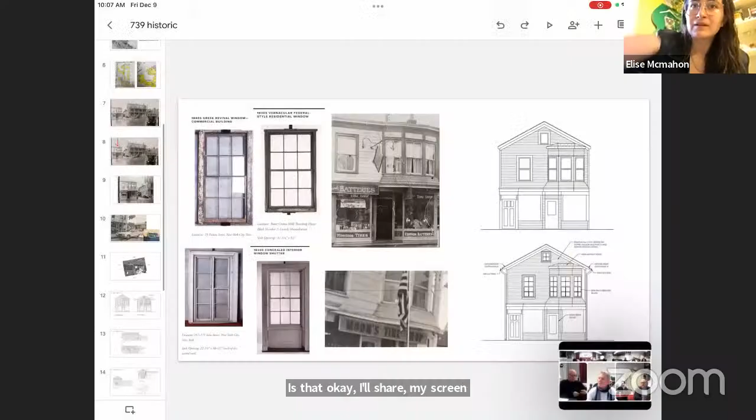Can you see that? Yes. Okay, great. So I'm here representing my mother, and we've been working together on the renovation plan for 739 Columbia.

One thing that was interesting is that I went to the library to find out from the archive any history and find images of the building, and there was actually a lot of documentation. The property used to be owned by the same owners as the St. Charles Hotel, then it was subdivided, and the building wasn't there until 1921. It had been pulled up Lower State Street with a team of horses, which was interesting. It was owned by an operator of a gas station, then he sold it to the operator of a tire shop and mechanic shop. It was purchased in the 70s by Tony and Josephine Cusimano, who then sold it to his sister in the 90s for $1. We just bought it from him last year.

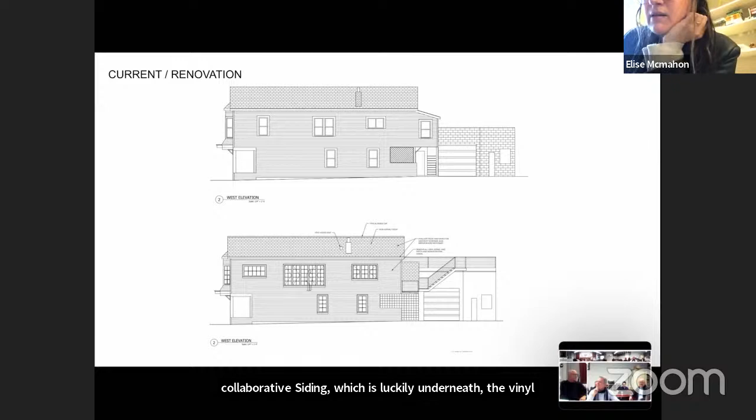Here's the side of the building and what's along the alley. We would hopefully be making the windows a bit larger and doing the same kind of Munson style windows, updating them. On the back, there's a kind of unsafe, not to code stairwell.

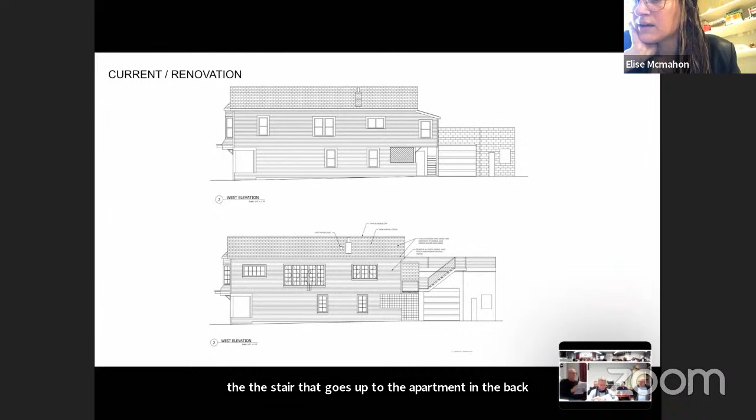So we would be removing the stair that goes up to the apartment in the back, and doing a code compliant stair, and also enclosing that area so it doesn't allow rainwater in. To do that, we did a glass brick wall on the bottom right there, if you can see. I'm happy to zoom in if you're curious to see closer.

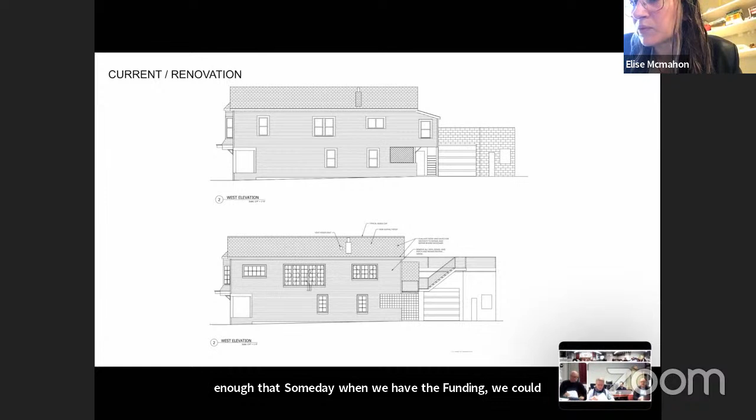We would be repairing the roof, basically making it strong enough that someday when we have the funding, we could do a metal roof, but right now we would just be replacing the asphalt shingle roof.

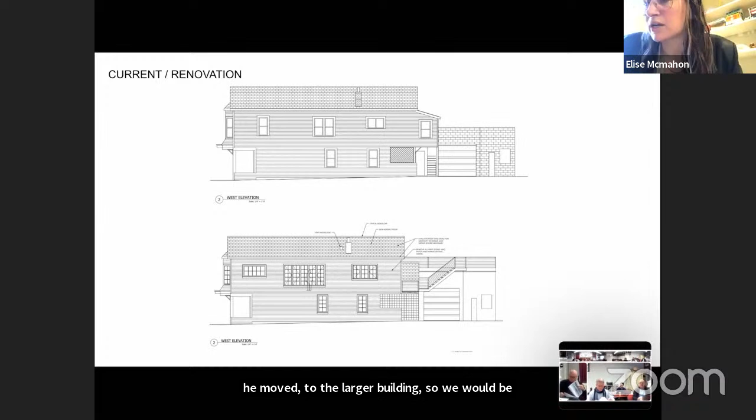On the back, there's the garage, which used to be kind of the tire shop for TJ before he moved to the larger building. We would be keeping that a garage and then having the stair also lead up to a porch there for the apartment to have some outdoor space.

So here's the back view. And on the right, you can kind of see how the stair is just going straight up to the apartment. And there's also the small balcony that comes out of the kitchen.

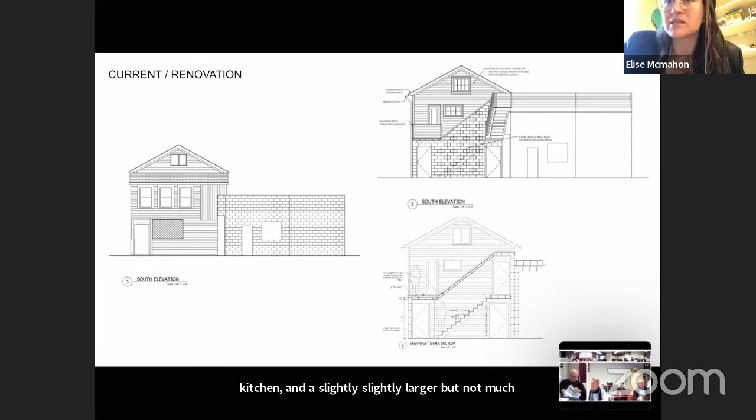And a slightly larger, but not much actually, just a slightly larger window for the attic there. And then basically because we would be removing the stair area, there used to be like an upstairs back porch that had windows on it, like a solarium. So that's all getting removed because it wasn't code compliant, and we would be replacing it with this smaller upstairs balcony.

And then this is the side that faces the chocolate shop, and it is not visible, and we're not changing anything about the windows there. We'll just replace them and make them more heat insulative.

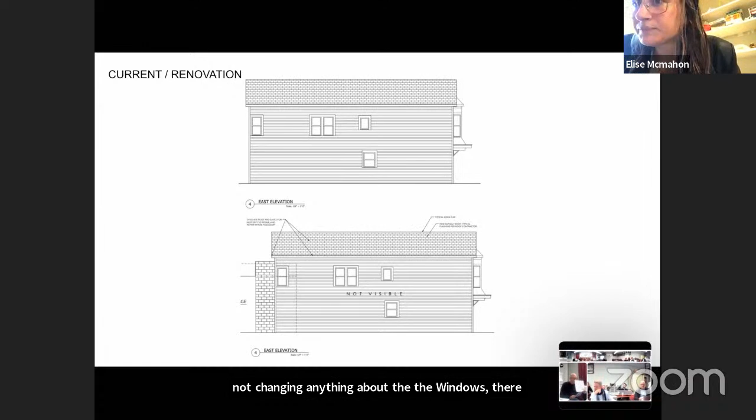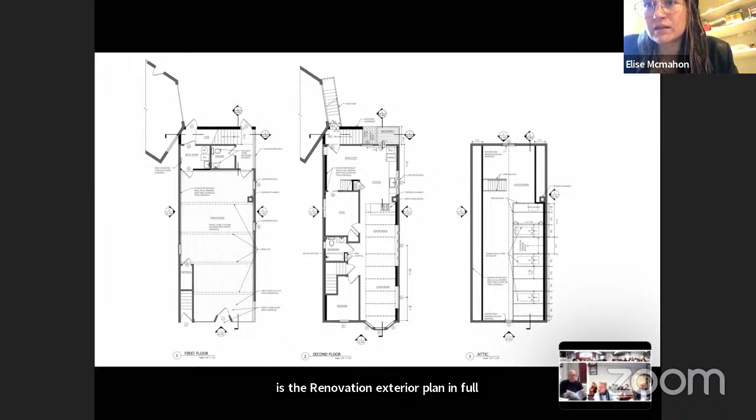And this is the renovation exterior plan in full, and then this is the layout. I was also bringing up some images of window reference images from the time period. We're not exactly sure what year the building was built - we just know that it was brought up State Street in 1921. So we imagine sometime in the 1800s to late 1800s. You all probably know more by looking at it.

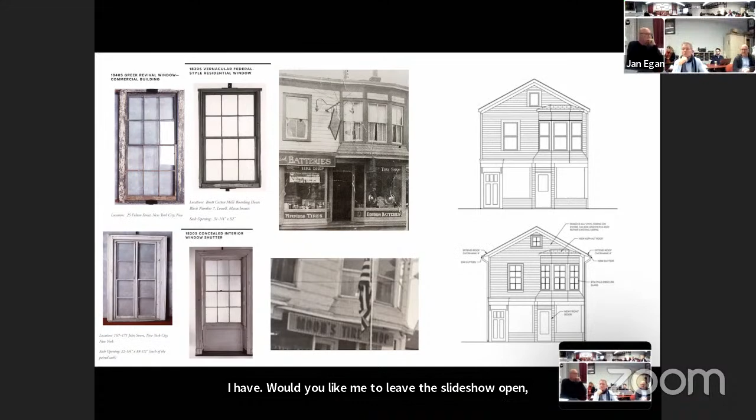But yeah, that's all I have. Would you like me to leave the slideshow open, and would any of you like me to flip back to any of the pages, or should I close it? Yeah, please leave it open. Okay, so any questions, comments?

Yeah, I'd like to start. I think the history, the research that you did was terrific - that's really an interesting fact that it had been moved there from State Street. I'd like to start with the facade and the windows. I think if you look at the original photograph, you'll see it was 2/1 windows, and even the old hotel next door is 2/2. I don't know if the 4/4 would really be appropriate.

It's 2/2 in here, I'm sorry, 2/2 rather. Yeah, that's the one - if you zoom in on that picture, you'll see the windows are 2/2. And that's more typical for a building of this period, and you'll see that on the hotel next door as well. Okay, I see.

So would that have to carry through the entire building, or could that just be on the front facade? I would recommend that it be the same all over, because that's probably what it would have been.

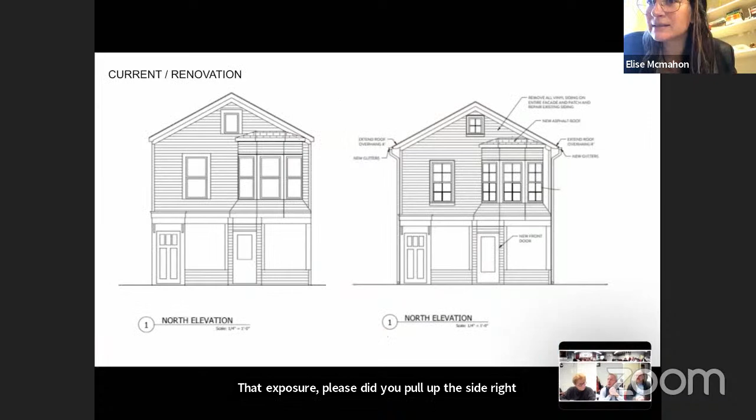And I just wanted to talk about the facades - I would recommend that you stay to 2/2. And regarding the side, I mean, you're really altering that exposure. Elise, could you pull up the side for us? Yes. By changing the window sizes and style.

Yeah, I wonder, would it be possible to basically just do the 2/2 windows? I'm curious kind of how we would do the more horizontal windows, but I feel like we could find something correlating to the 2/2 style.

Does anybody else have a concern - let's deal with the issue separately. Does anyone have a concern with the reorientation of the side facade window? They're changing the orientation of the upper left, they're doubling the size of that center window, they're increasing the size of that third one, and then the bottom two are about the same. Does that bother you particularly?

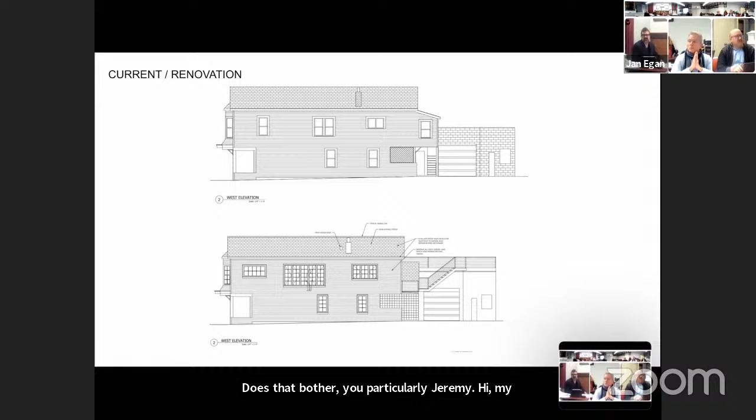My biggest question was about the 2/2 - I think that'll be the second question though. The glass block was the one thing that really stuck out in my head as being incongruous with the rest of it. Yeah, I have less concern about the orientation of the windows because they're already kind of miscellaneous, and it is an alley facade. But I do agree with everyone else that the 2/2 is much more appropriate.

So if the applicant were to revert to 2/2 throughout the building, would we be comfortable with this window arrangement? I'd say yes, I would. Okay, I think we'd like to see what this ends up looking like though - we want a rendering, because you're gonna have to figure out how you're gonna make this large. Okay, so maybe that's the request - how does that strike you? That's absolutely fine, you'd like to see a rendering of this with 2/2. Yeah.

Of the facade and the side. But I think the commission is open, assuming that comes out well, to the arrangement of the windows that you have.

Okay, thank you. But also look at it as an opportunity - if you look at the large window on the back, to align that right edge. If you're already opening it up, you might look to create some clear verticals here. There's still some misalignment that you can rectify as part of this, that we've seen on the side.

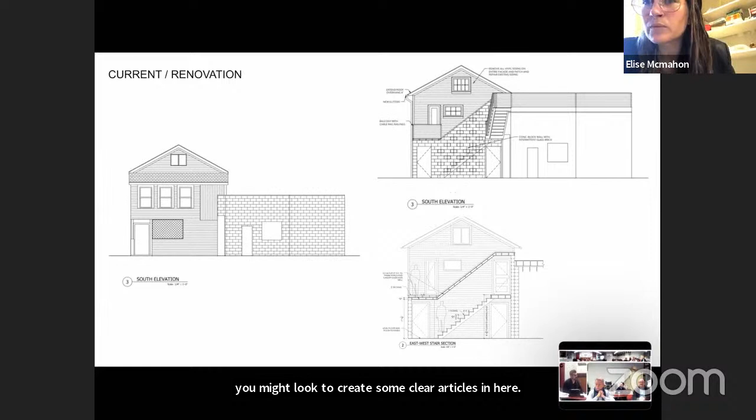Which edge are you referencing? Sorry, I'm just looking at the photo. We're gonna go back to the side, the previous one, to the large window. The large window that you're proposing - if you look at the window below it, it's misaligned. If you're opening up that hole, why not align that right edge? Try to create some plumb lines with what you're doing with the grid. Absolutely.

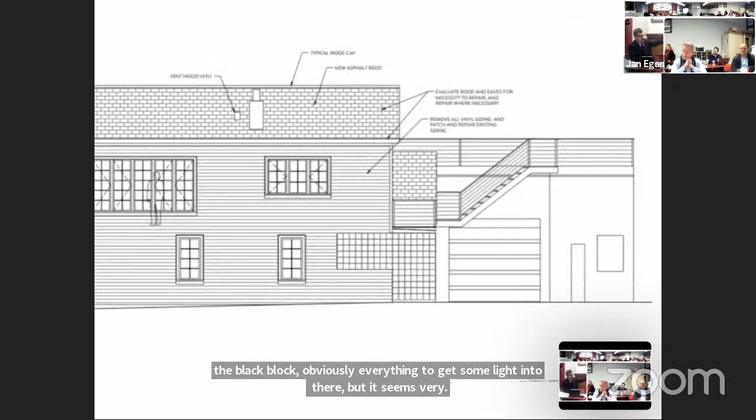The glass block - can you explain to me the rationale for the glass block? Obviously you're looking to get some light into there, but where's the glass block? Can we see the small grid, lower right? That's all glass block. So what's interesting is it's been a very awkward back area since the 70s.

And it has this kind of open lattice walkway happening. And basically the back area is now becoming aligned more with how the garage has this cinder block and stuccoed surface.

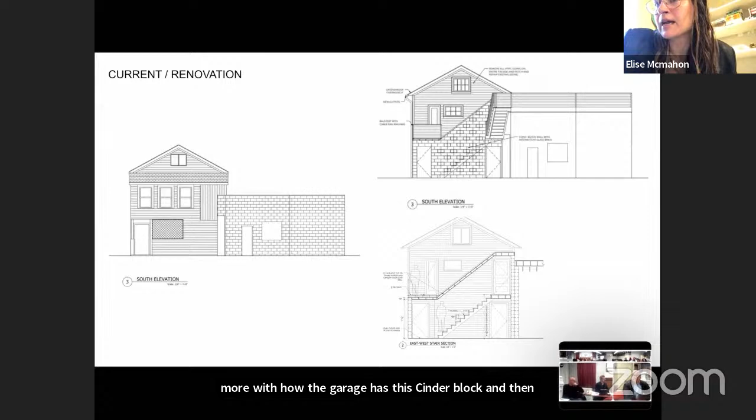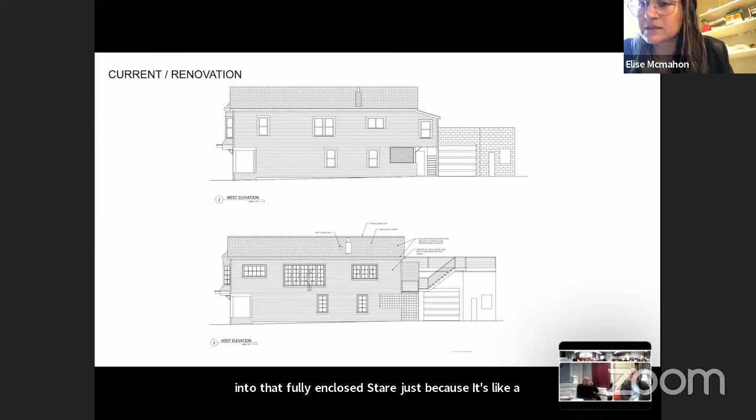And so to bring some light into this cinder block diagonal stair, there will be some interspersed glass bricks in there, shown with these darker lines. It's been all spec'd out by our engineer. We were hoping to have the glass bricks on this side just to bring more light into that fully enclosed stair, since it's a very enclosed area to keep it watertight. We wanted to bring in as much light as possible in an admittedly playful way.

And also because it's in the back of the building, it's not very visible from the front of the street. So we were taking it as this opportunity to transition to the back area.

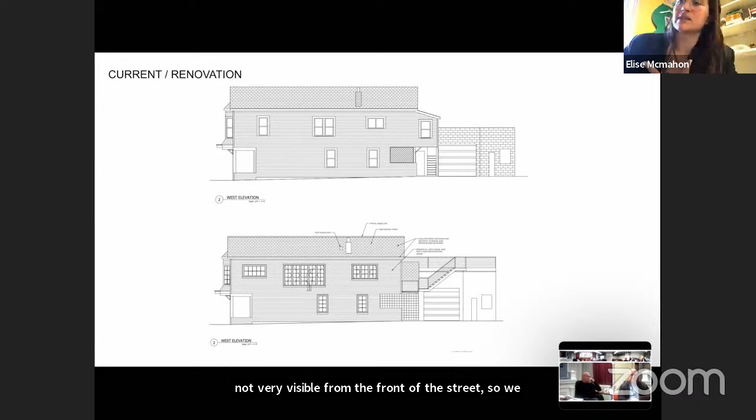I think Jeremy's not that enthusiastic, like the other commissioners. Part of what's challenging about this is that we don't have a photograph of what the back looks like now, and it's a little hard to figure out from the elevations. So that would be helpful, I think, if we did have a current photograph of the back.

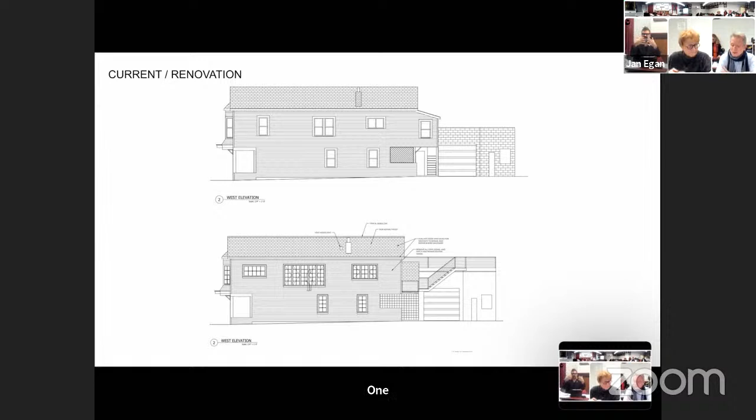The transition is tough to read. It's like we're trying to merge two things into one - either make it modern or keep the integrity of the original architecture. I think this kind of hybrid, the introduction of the block on that facade, feels jarring to me.

Is this visible? On the alley side, there's a building - it's very near to where I live, so yes, there's a building, what's next to it, three feet away, a Tudor style garage. That's it, that's the back of the garage. It is - so you can see, yeah, there's a large parking lot there.

Yeah, so it's rather visible. I think we're all saying we'd be more comfortable with something that was a little more consistent with the style of the building. If you do a window, it would work and ties into the other window.

Since you're coming back with the 2/2, would you consider reworking that? Yeah, definitely. I'm still hoping to do the cinder block on the back if that's possible, with the interspersed glass brick, just because-

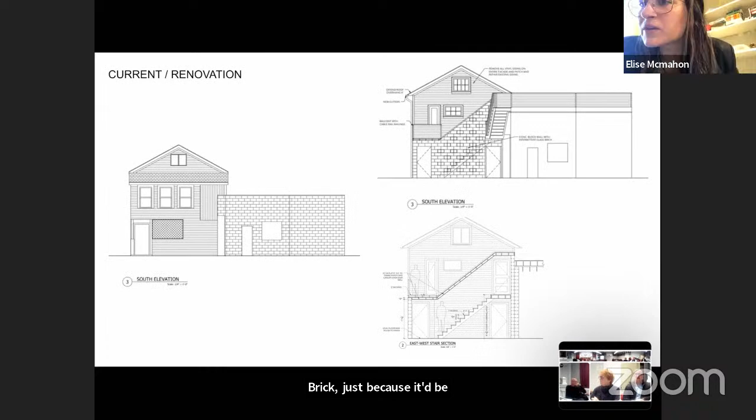Go back to that, let me see. So basically in the way back, which is very much not visible to the street, I'm hoping to keep that relationship to the garage, if you all are open to it.

That's the back of the house. This is the total back. So it's not visible - does anyone have concerns about that? It feels like it has intent and it's on one side, and it's not wrapping around the corner, right?

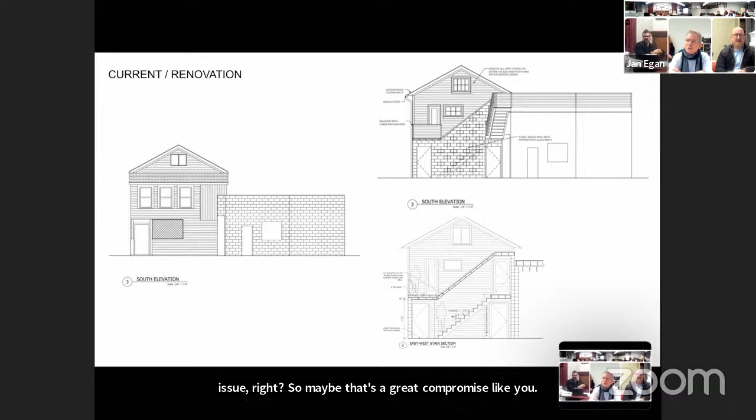Okay, so maybe that's a compromise - keep that element, but perhaps turn the glass brick that's on the side into something that's more in keeping with the remainder of that facade and the front facade. That seems very reasonable. I had to have a lot of back and forth with my mom about that detail, so she'll be happy.

Well, you both get something out of that. All right, so is there any other questions on this?

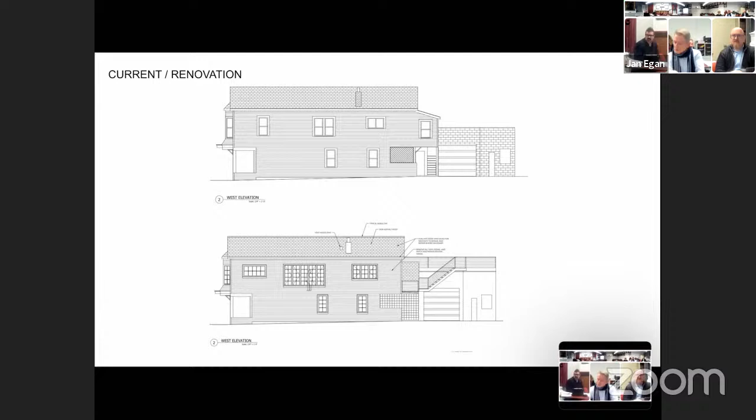So I think we need to see this again. I don't think we can mark this as complete, but we are meeting next week. Okay, amazing, so I can bring back next.

Without an email. It's complicated. They can bring it to the office and then bring it here to eliminate that, and bring it back with them next week. All right, why don't you plan to bring it back, we'll put you on the agenda for next week and plan to bring back this image, and we'll look at it and create a certificate of appropriateness then.

If you could bring a photograph of that side of the building, that'd be great too. And if you're not here, someone can go and take one for you, I'm sure. I need five copies, I guess. No problem. Sure, yeah.

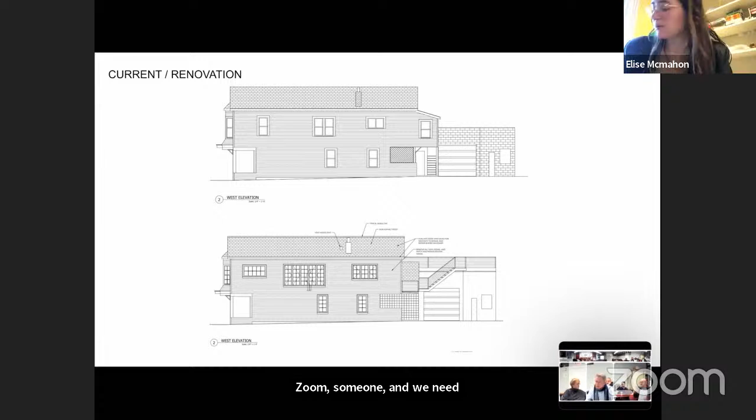Good morning. Morning. Good morning. My name is Donna Brown. I'm here representing DAR and the Robert Jenkins House. With me on the phone, on Zoom, are our regent Virginia Martin, and our architect Marilyn Kaplan. Yes, Marilyn.

So this is about the Robert Jenkins House. We're applying for a certificate of appropriateness. You're all aware that it's on the National Register and within the Lower Warren Street Historic District, and that it was built in 1811 by Robert Jenkins, who was Hudson's 3rd and 5th mayor.

I don't see his picture, probably because it's in our house. We have his picture. It was renovated and given to the newly formed chapter of the Hudson DAR in 1900, so there were a lot of renovations done at that time.

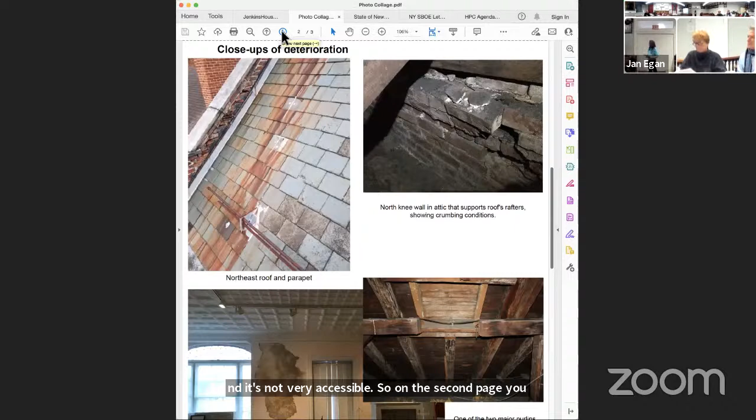So on the second page, there's a close-up picture of the roof. That's the northeast roof, and you can see the damage to the slate and the parapets. On the right is the north knee wall from the attic, which needs to be rebuilt.

On the lower left is the damage to the museum wall, we call that our latest watercolor. On the other side, there's the purlin, now there's 2 purlins in the attic, and one of them has a cut that's about 3 feet wide. It's just out of the purlin, missing this section, so that needs to be fixed at the same time.

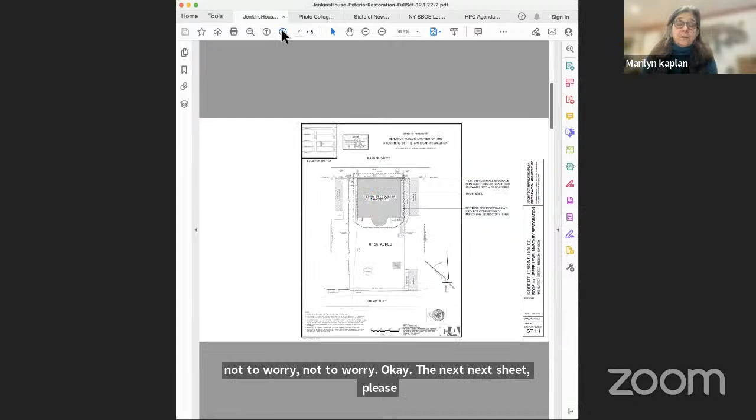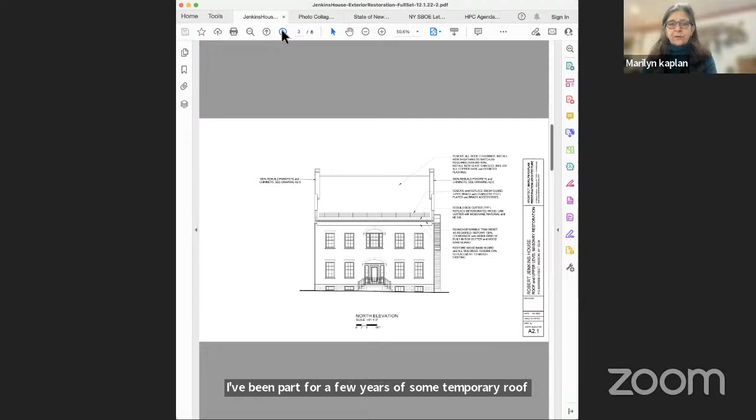That's our front north elevation. We're essentially recreating everything that is there now. I've been part for a few years of some temporary roof patching, both at the built-in gutter and some slate replacement. But essentially the plan is to reslate the roof, new sheathing as required underneath, rebuilding of the masonry parapets completely, and the rebuilding of the interior work at that north knee wall that you just saw. And the installation of new pipe guards, snow guards at the north elevation and at the south elevation.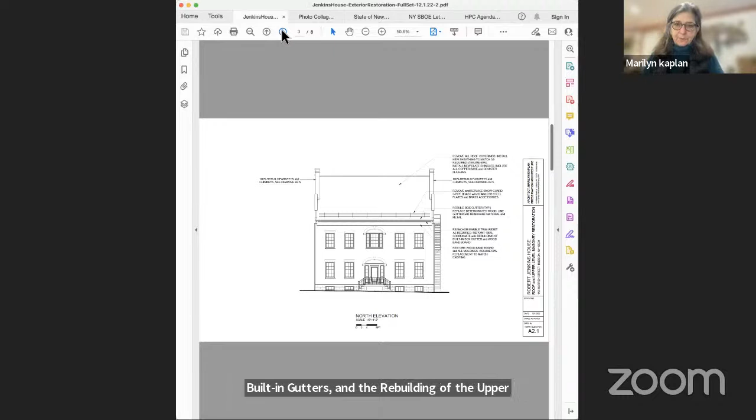It's really at this point in the discussion intended to be a full restoration: new slate, all copper flashing, rebuilding of the built-in gutters, and the rebuilding of the upper masonry. When I first got involved in the project, it didn't take long to realize that the roof project was not just a roof project, but really roofing, masonry, and carpentry. So the masonry is all of that upper wall failure at the parapets. And of course the carpentry will be not only the sheathing beneath the slate, but in addition, the rebuilding of the box gutter. Next drawing, please.

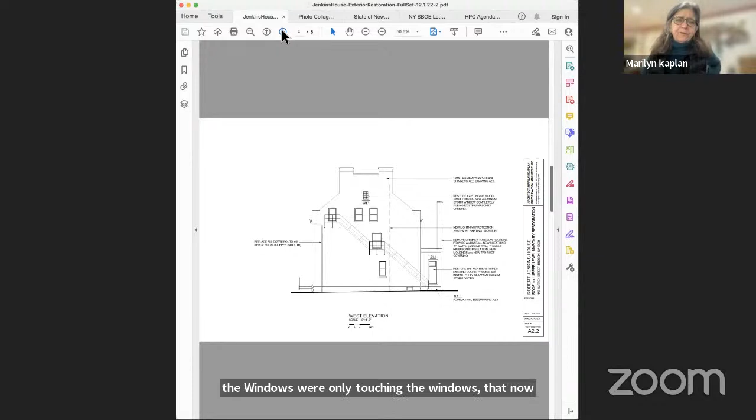That's our west, our side elevation. The windows, we're only touching the windows that now have vinyl sash replaced at some earlier point. We have photographs of that if you want to see. It's a 6/6 sash, because that is what remains on the east side of the building, and that's all the evidence of what was there originally. Now we'll pick up the doors on the south elevation.

There's our south elevation. We are recreating that box gutter in the center section. Again, that was removed when the theater was installed. New leaders tying to existing and cleaned out subgrade drainage.

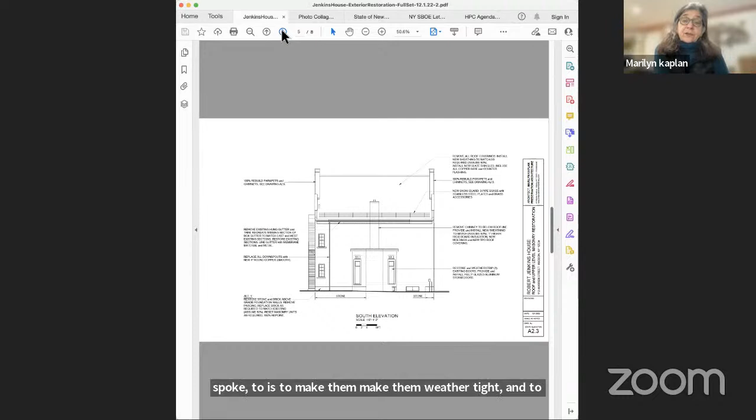And the intent now with those existing dining room doors that Donna just spoke to is to make them weather tight and add an exterior glazed aluminum door, a storm door if you will. It seemed the least damaging to the original doors. We didn't want to build it up with plywood on one side or the other. If we replace them with insulating doors, we wouldn't have the original doors or be able to recreate them given the thickness that would be required. So a fully glazed metal storm panel seemed to be the most appropriate work there.

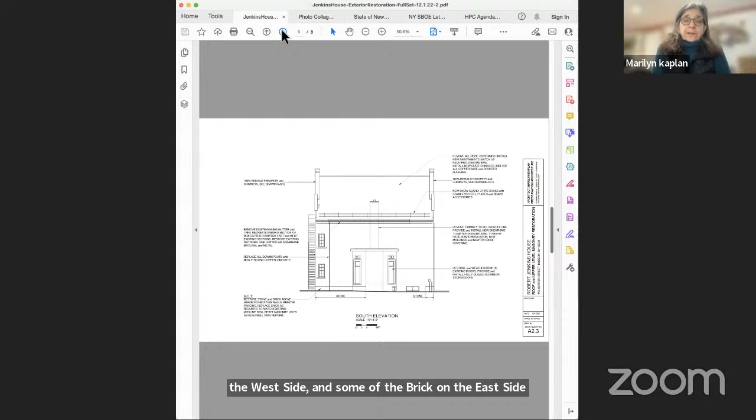The other work at the south elevation, just FYI, is masonry repointing both of the area of stone on the west side and some of the brick on the east side. And of course, that big, tall, scary chimney in the center will be taken down and a new low membrane roof installed on that low slope section above the dining room apse.

This is just a repeat. There's our removal of those windows and replacement with 6/6 wood. There's our dining room door and the parapets, again, rebuilt from the roof line up, and removal of that south chimney.

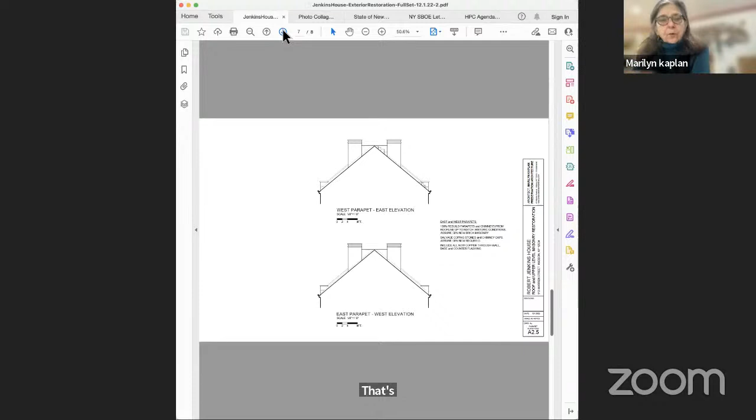There's just some blow-up and details of the masonry work, the original chimneys and the parapets, and we'll be adding some more structural notes to these drawings, keying back to structural drawings. Dan Proper of Proper and O'Leary has been working with us on the project.

The roof plan, really just a repeat of the notes that we just spoke to. Some of the details for the structural work and interior work will be keyed to this. But again, new slate, rebuilding of the masonry parapet walls, removal of the south chimney, and the snow guards on both the north and the south.

I think, Virginia, that is it. Thank you very, very much. You're welcome. Shall I leave this up or take it down, commissioners? Sure, let's leave it up in case we want to flip through it.

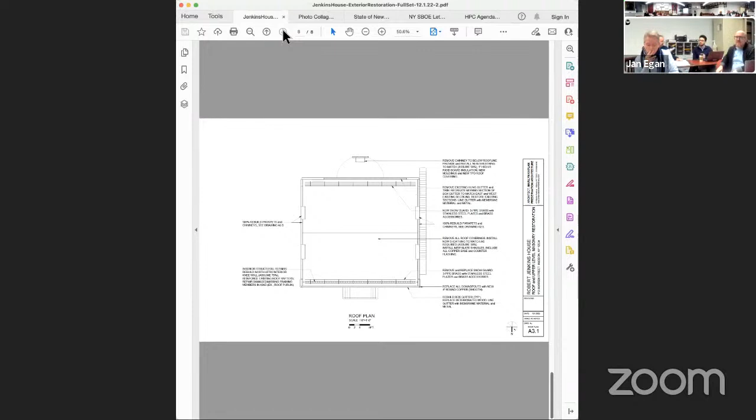So there's a lot here, but it strikes me that there's not much change, which is great. So maybe we could isolate the elements that are not being replaced like for like. I heard that the roof is being replaced with slate. I heard that the chimneys are being torn down and reconstructed. I heard that the chimney in the rear is being torn down and not reconstructed. And then I think we'll want to ask about the windows as well.

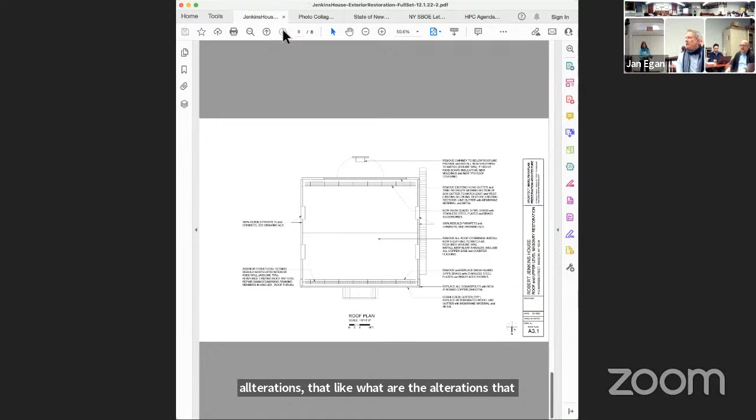For starters, the chimney in the back is from 1900, not from 1811. So are there any other alterations that are proposed that'll make this different, or what are you not replacing in kind? What about, so let's talk about the windows. Is there any change?

Virginia, you want to go back to the photos? Those will show up - ooh, they may not show up on this. Do you have the east or the west? Okay, they were replaced with vinyl windows at some point. There's quite a bit of deterioration on those third floor and attic areas.

And there is, of that same size sash within the masonry opening, there is another 6/6 window. So there's no question in my mind that it was a 6/6 window, and we will go with a wood true divided light window at that location. So we can provide some more documentation, some more photographs specific to the window showing what's there, the basis of our decision and what's proposed.

Let's be okay with the specification for the window, because I think we'll take your word for that, unless anyone disagrees. So those are the only windows being replaced in the entire project - certainly all of the windows are going to be restored. That is great by us. Yeah, we're really interested in the ones that are being replaced. Restored sounds great. Yeah, they'll all be restored unless they can't be restored, then they'll be replaced in kind - they are 2/2.

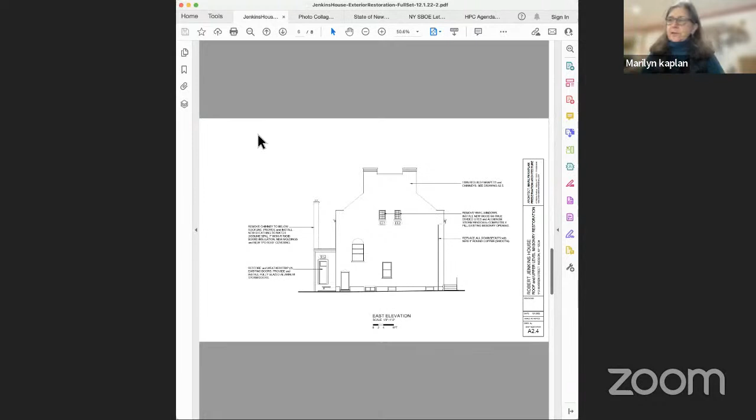Virginia, can you switch back to the elevation drawings? I want to respond to that in a second. I think it's the third sheet—no, the fourth sheet. The A2, next one. No, next one up.

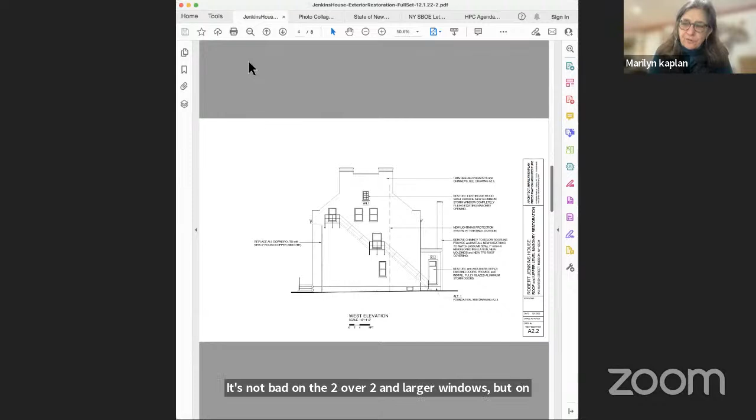Perfect, you see how small the window is. In my experience, quite a number of wood or metal window manufacturers will reproduce true divided lights. But the problem is, to hold the weight of the double glazing, the muntins get really fat, so the proportions get wonky and the glass itself shrinks in size. It's not bad on the 2/2 and larger windows, but on a small window such as this, a true divided light with double glazing is not visually compatible with what would have been there originally.

I deal with some of the window manufacturers, wood and aluminum, on a regular basis, and I'm still struggling with it. Different commissions have different approaches as to what they're most comfortable with, so that'll be good to know—I think we're flexible.

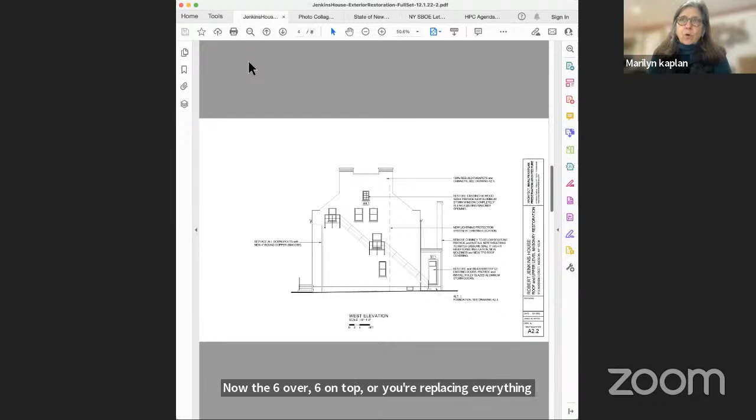Can I ask a question? I'm confused—are the only windows you're replacing right now the 6/6 on top, or are you replacing everything? What's being proposed? The only windows proposed to be replaced at this moment are 1/1 vinyl windows that had been added, and they will be replaced, just the 3 windows. They will be replaced with 6/6 wood sash as currently proposed.

True divided light. Those are the ones at the top of each of the side renderings, right? That's the only windows we are discussing. Yeah, that's the only windows where there's a replacement.

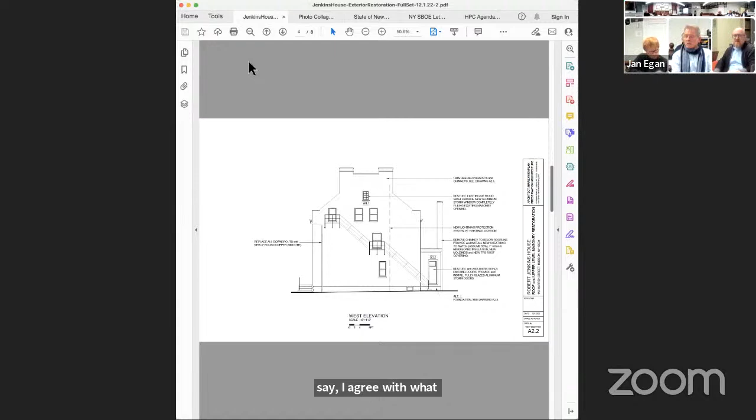We will need to see a rendering and spec sheet of exactly what you're proposing. If you want to talk, Marilyn, we'd be interested in your opinion, but you may want to confer with our architect, Chip Bowles. I agree with what Miranda says—we generally look for a lighter touch and something as historic as possible at the moment.

We also need the concurrence and approval from the commission, and then the State Preservation Office, and then the National Park Service, because the grant we're working under, Save America's Treasures, is the highest caliber of grant programs the Park Service runs. So I'd like to start with whatever you're all comfortable with and take it up, but they might bump it around for us.

I have a feeling that whatever SHPO says, we would tend to be okay with. Oh, I'm sorry, National Parks—if they have an approach they've used in other historic buildings, I don't know that this commission would have a big problem with them. I'll bring that back to you with the information.

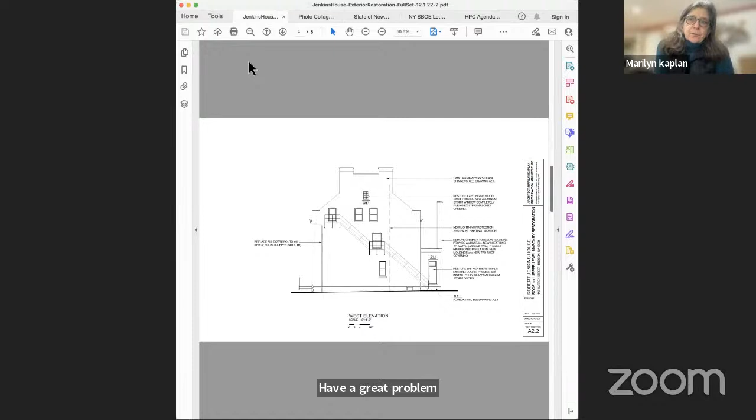Again, the intent is to remove the 1/1 vinyl windows, which aren't doing any favors to us visually from the exterior or in terms of weatherproofing at the interior, and to replace them with what is appropriate as determined by the reviewing authorities—what is determined historically appropriate.

So could we take a second to talk about the doors in the back? That's where I was going, right—that's the other change. These are the storm doors you're placing over these doors to preserve them. The drawing up now, the A2.2, says we want to restore those doors.

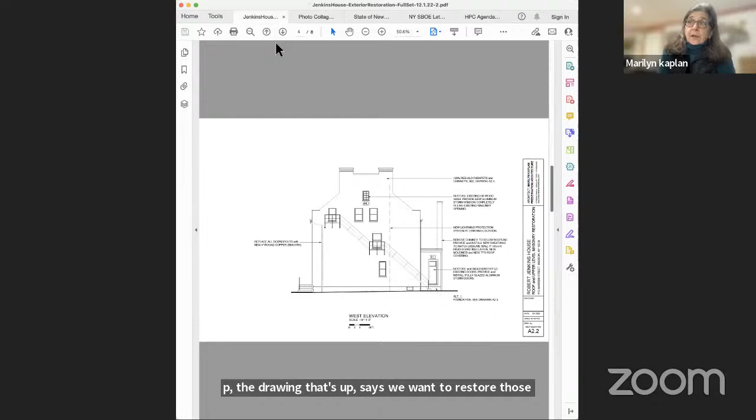They're interior doors, so they're not good for weatherproofing. We want to restore the doors and add weather stripping to them—they're very thin. The intent was to install a fully glazed aluminum storm panel on the outside, additive in addition to the restoration of the original door.

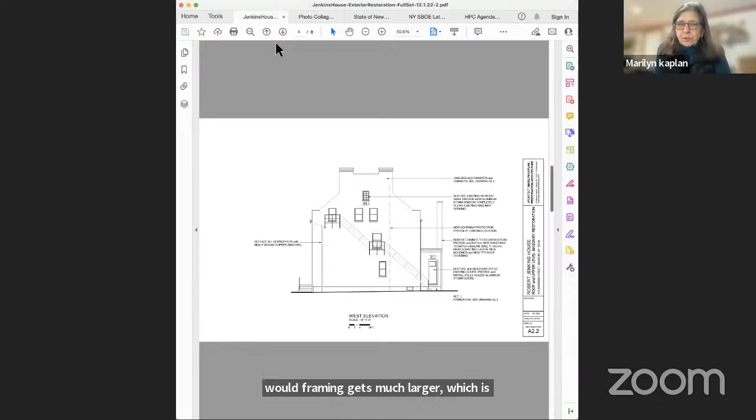It's kind of the same discussion as whether or not to use an aluminum storm window that we just had. We could do a wood storm door, but the wood stile and rails, the wood framing, gets much larger, which is why, when it's determined appropriate, I like to go with aluminum.

Miranda, do you have an opinion or concern about that? We would need a specification of it. I have some concern.

I'm a little confused as to whether this is a temporary patch until you plan what you're gonna do with that back area. If you're gonna build a deck there and have an ADA entrance, you may treat the doors again. But I am concerned about just putting an aluminum storm door over it because it's so extremely contemporary on this very old building.

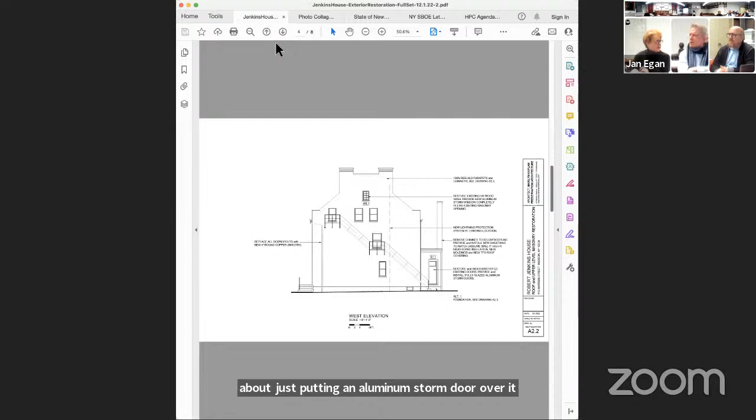Would it be a mostly glass or all glass panel? It's not gonna be like a residential door, that's not what you're proposing. No, it would be what we call fully glazed, and the only frame visible would be wood or metal, only as necessary to hold this large piece of glass, which is just a little bit smaller than the door.

Again, if the Parks Department has used this before, and you see mostly the interior door, then we would tend to go with that. Storm doors are loaded, like, oh, we don't want to see 1950s. But I don't think that's what's being proposed.

The other thing is, if it's a door, our insurance company would probably be a little upset that it's a door somebody can open and step out of regularly, before we put the rest of the steps in. So that will mean you'll have to put some steps or something.

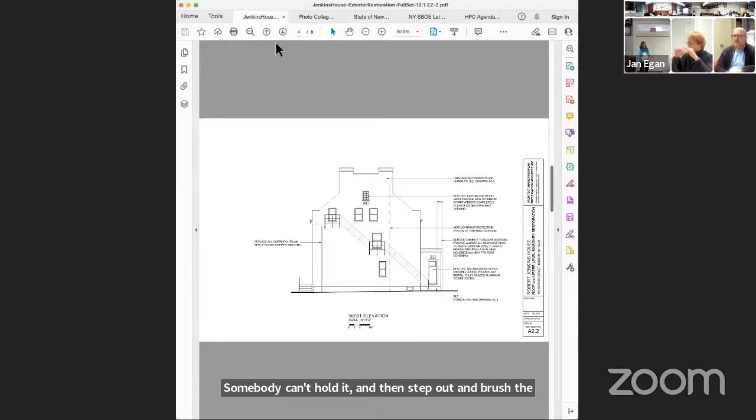Oh, Donna, that's a very interesting point. Okay, we haven't spoken of that. We'll come back with a little more information on the windows and on the doors.

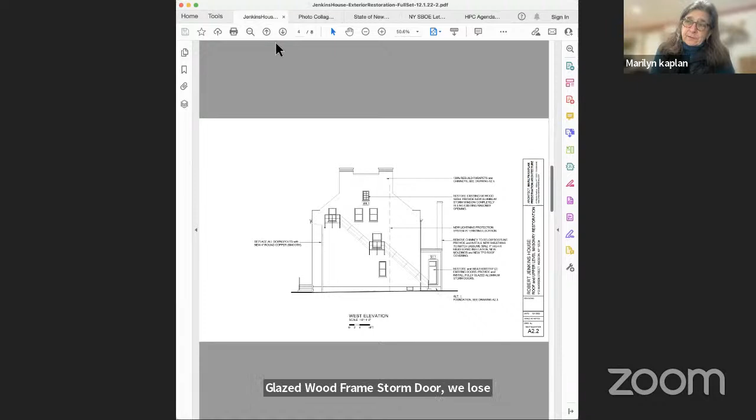We'll loop it back to the State Preservation Office and the Park Service, and then bring that discussion back to you. If a better precedent is determined, I'd assume the chapter would be very comfortable with a fully glazed wood frame storm door. We lose nothing by that except a little bit of visibility of the prime door. But if that's a solution we can all point to later and say we've got a nice wood storm door over there, I think that's a reasonable approach. That seems like a good compromise to me.

If I may, the windows may be a little bit of a different discussion because of the size of the window in the 6/6 sash, but I like that as a solution for these doors.

And the chimney, I think we're okay with that. Does anyone have a concern about the chimney, the 1900 chimney in the rear? No. So I think that's all the items anyone's able to see that are actual changes.

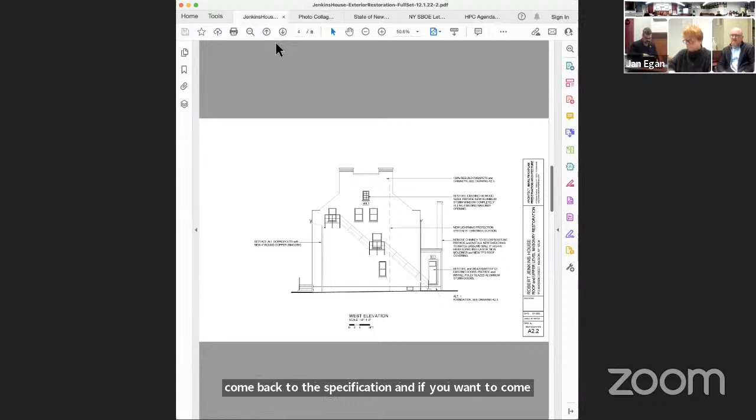So it's the 3 upper windows, and you're gonna come back to us with specifications, and if you want to come back after review with the Parks Department, that's great. It's the coverings of those rear doors, and you're gonna come back to us with specifications again, if you want to do that afterward, that's fine. And then the removal of the chimney, that's gonna be in your certificate of appropriateness, is okay.

And if you determine that other windows are to be replaced, we would need that as an addendum to your application, so Craig can enforce it. I'm assuming you'll want it back when we have the full list of things we want to do, and you'll have them in more detail.

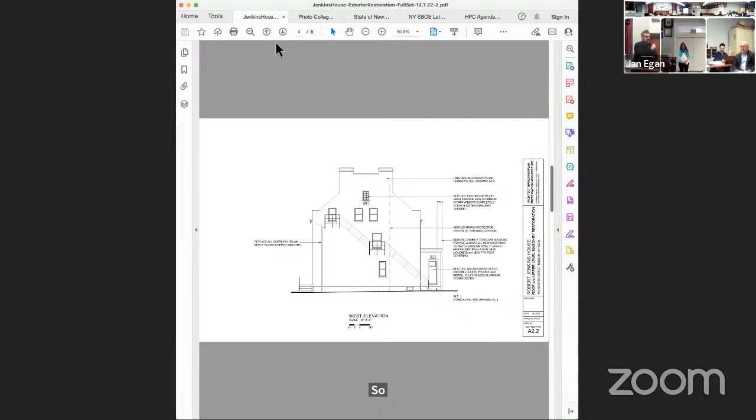But I did want, while I'm standing here, to talk about roof coverings. We are all in favor of slate. Now, the back roof is asphalt shingles now from 2009, and the plan is to do slate over the whole thing, but there are people, and this is an opinion we'd like to hear from you.

There are people arguing that these synthetic slates are better, that they last longer, that they're easier to maintain, and I'm not a synthetic slate person. I just recommended it to a homeowner with a beautiful slate roof in Hudson, and they were not happy.

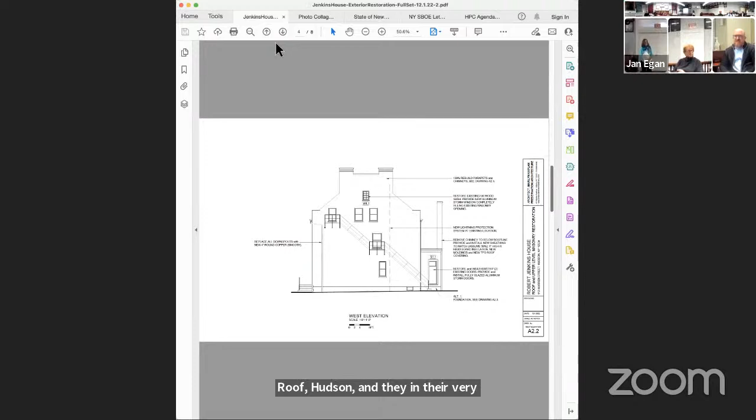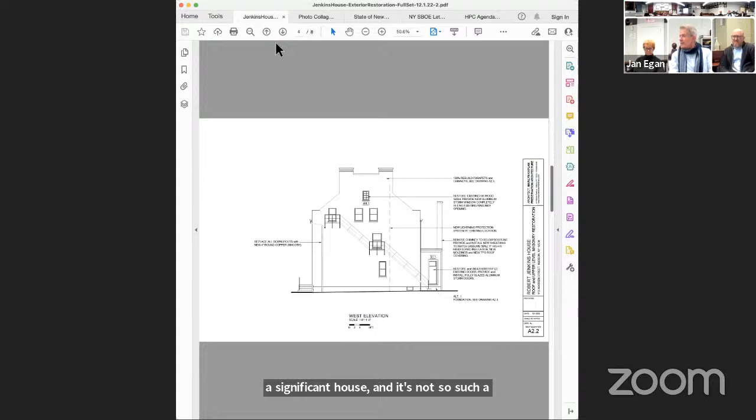So I guess the question is, does this commission have an opinion on whether we would prefer a house like this to have real slate? My preference would be, only because it's such a significant house and it's not such a financial burden, if it could stay slate. But once you get the estimate, if it's going to be an issue, maybe you could explore other options. Though I understand real slate could also be an issue if there's a weight problem.

I think the issue here is, as you will know better than anybody, this really is a significant building in Hudson. So it should be treated with the highest level of care and scrutiny. And for that reason, personally, I feel if real slate works for you, it would be preferable to use it. That's my personal opinion.

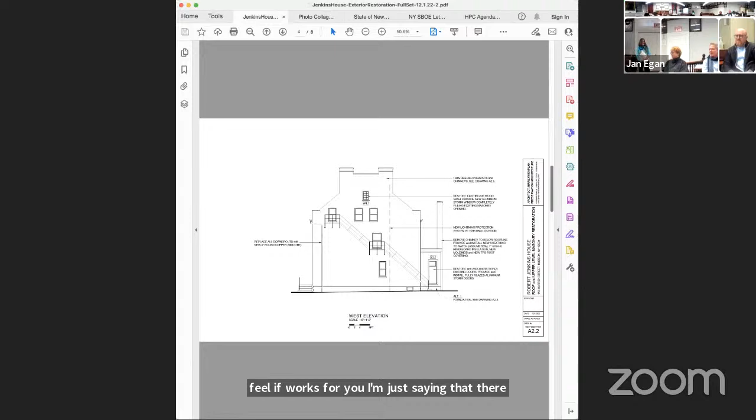I'm just saying that there is a lobby that is trying to push synthetic. So I guess what we can say, John, correct me if I'm wrong, is that we have approved synthetic materials in other cases, but we would need to see what it looks like. I don't know, I would go with your first comment, which is this has a high level of scrutiny, and slate is good.

Do you guys have an opinion? I prefer slate if we can. And Jeremy too. So I think the consensus would be slate unless there's some other reason not to have slate.

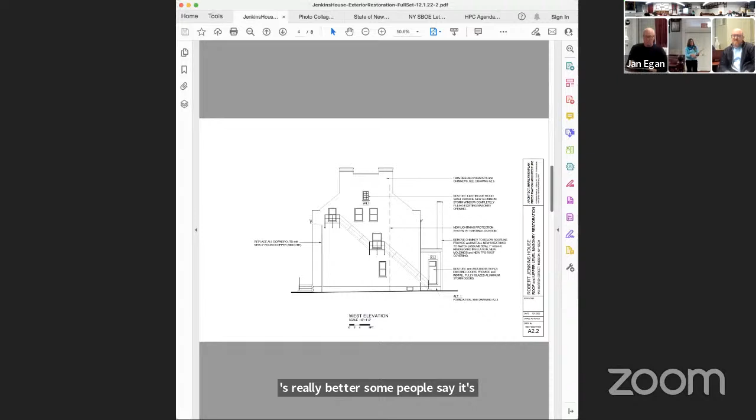And what I was trying to understand is, is it truly better? Some people are saying it's better, it lasts longer, and I'm thinking it hasn't been around long enough to show us that. Well, the website says it's better. Actually, my question's a little bit different.

And I'm kind of, this is just an open discussion, and as we've had it with the chapter and the representatives, it's kind of like let's see what the commission has done with this. In my humble opinion, it's slate all the way, and the substitute materials, whether they be cement-based, cementitious, or whether they be rubber or some other plastic material, I think they actually will not last as long.

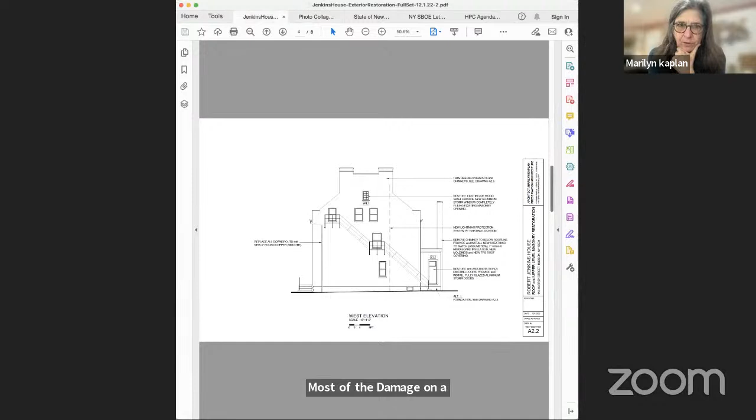Most of the damage on a slate roof is not really at the slate, it's at all of the metal flashing and gutters and places like that. I think long-term, it's a lot easier to maintain a slate roof than these other materials that we don't quite know about.

So I think we'll really find out through the bid process, and we'll set up an alternate to get a price on a substitute material, just to make sure we can afford to do this portion of the project with the funds on hand.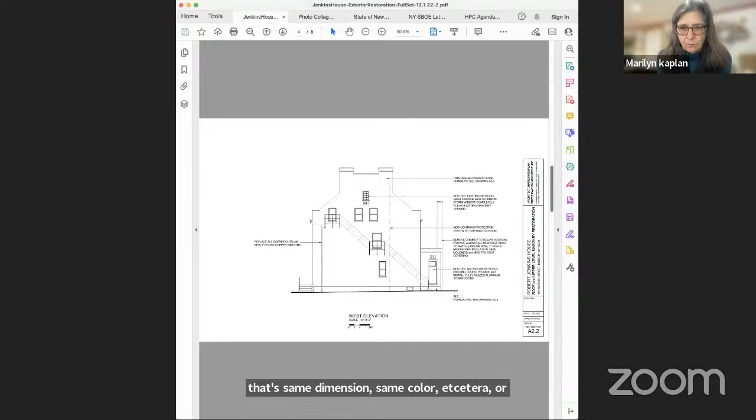But I guess my question is twofold. Number one is, when you've looked at substitute materials, do you have any preference for either a cement-based substitute material, meaning a slate that's same dimension, same color, et cetera, or any of the rubber type substitute materials? Do you have a preference for either of those?

I don't like either of them, but we'll need to look at them just for budget and costs, and we choose the best one. But as we start our search, do you have a preference for either of those? Whichever one is better, whatever one looks more appropriate.

Is that what we've done, and we always have a sample brought in? And you would get samples, yeah, as we would of course. Improving material, and we might even do a site visit, and on something like this it could even involve a public hearing. So that's not proposed now. That's correct, you would come back in the process.

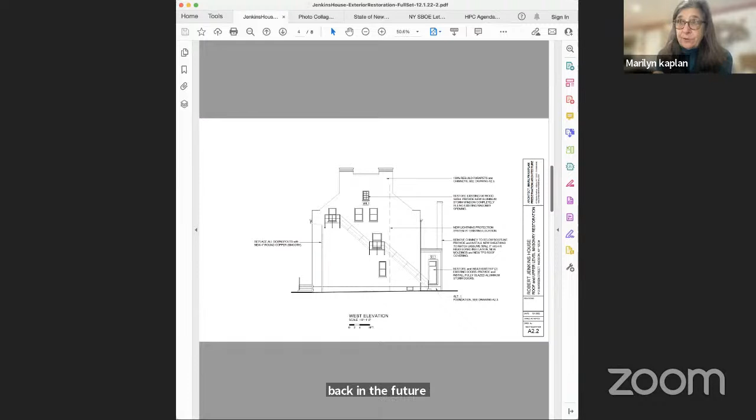Okay, if we're forced into that situation of using a faux slate material, certainly we would try to only do that on the south elevation where it's an upgrade, it's replacing asphalt shingles. So I guess just confirmation that if we end up in that sort of a situation, the less of the substitute material we needed to use, i.e. only on the south elevation, not visible from Warren Street, that would be appropriate.

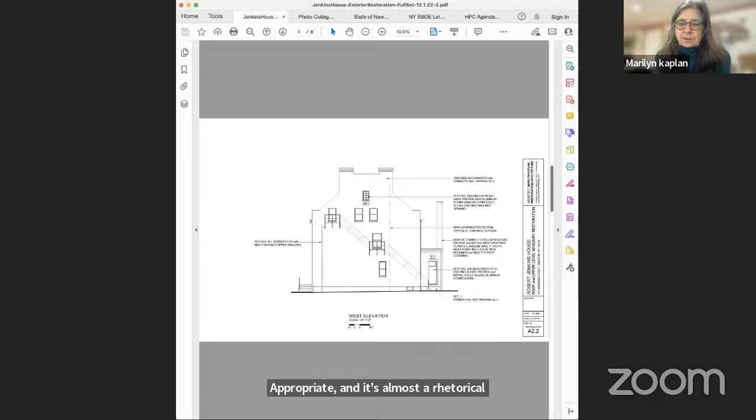And it's almost a rhetorical question, I guess. I think it is a rhetorical question. We really all would prefer real slate. Excellent.

And so if you need to make another proposal, you can come back to us. Whatever we thought was most appropriate, if we're forced into that situation by budget, whatever is visually most appropriate, durability issues aside. All the flashing would stay copper, all of the other detailing would stay, top shelf materials for a long-lived solution.

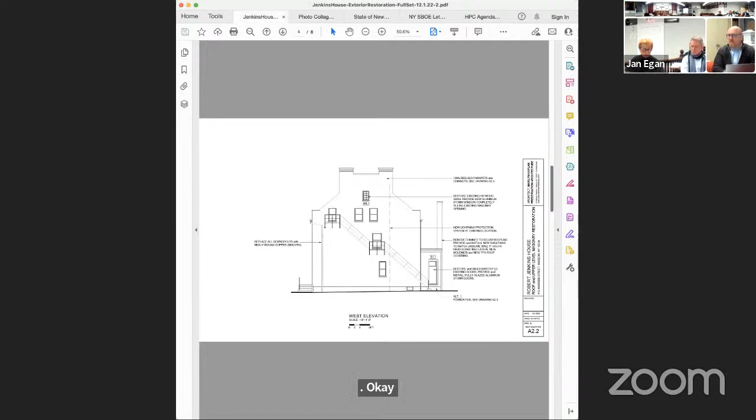By the way, I just want to comment, I'm so grateful that you're going to fix the box gutter in the back. That's really terrific. Building the way it is now. That's great, that's great.

Well, listen, I would commend you on your great work, and thank you for including us in this early stage. And congratulations on the grant you got. Have you raised the matching fund? No, but we're working on it. Great, appeal to Hudson to help.

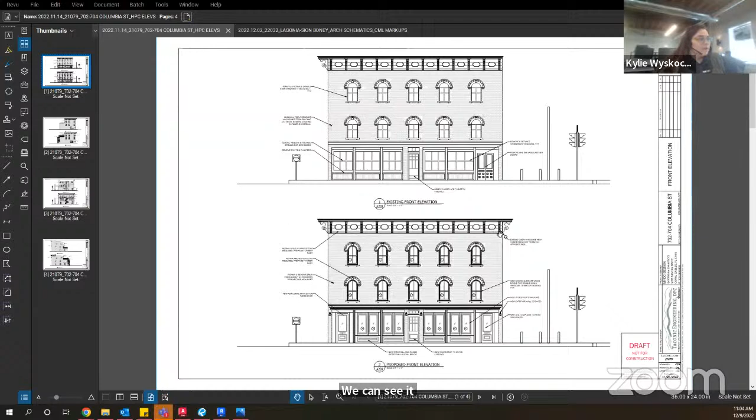None of the changes are occurring on the front, so the front is as proposed. We're creating 2 new ADA accessible doors on the front, and then the wood storefront windows, and then the new wood door to match existing in the center. So that's not changing from our last approval, right? Correct, none of the stuff on the front facade is changing. Let's focus on the changes that are new to this building, new to this proposal.

Sure. So we're removing the 12 by 40 foot addition that's on the back here. Programmatically, the inside of the building is staying the same, they just want to remove this. So basically the courtyard space has been simplified and reduced. There will be no more fence — it was a brick and wood fence prior, but they won't be installing that. Rather than having the tiered roof decks, there will only be one roof deck. The dumpster enclosure will remain and the parking will remain, there just won't be any program between them. I just wanted to clarify, Kylie, thank you.

I just wanted to clarify that we're not removing part of the existing structure. We're removing the proposed addition from the plan, so we're keeping the building exactly the way it is currently. So then we don't have to approve that change, because, well, I mean, we don't have to not approve that change, but...

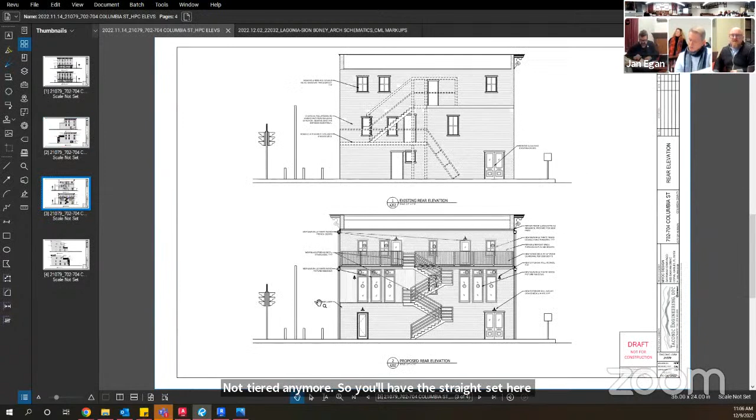But also there's no courtyard anymore. That's right. So you can see that we've removed the brick pillars with the wood fence in between. There's no fence that would be blocking this back elevation anymore.

I guess the biggest changes are happening here. On the bottom right-hand side we have those existing double doors. Because it's now going to remain an exterior wall, they'd like to keep those existing wood doors there - they'll restore those and reinstall them. There's no longer exterior access to the second floor because there's no roof deck there, but the layout of the windows and the transoms are the same - it just went from a door to a window. The third floor is the same.

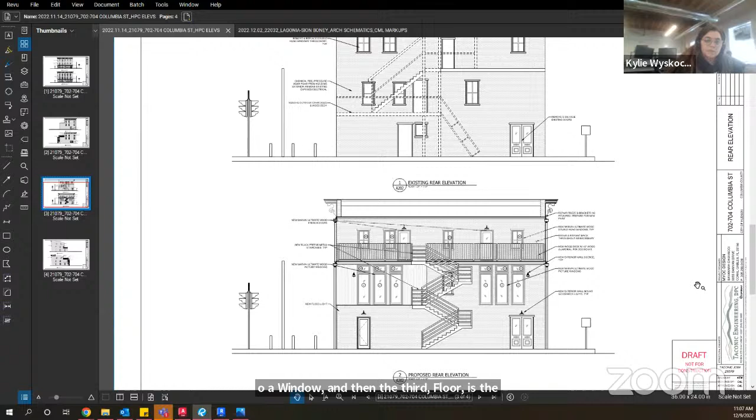And then here on the train track side of the building, we're still planning on enclosing this portion here, as previously approved. Yeah, really, that's it. It's not going outside of the existing footprint. It'll be much less busy too. So we're not really changing anything other than doing what the plans are changing.

Right, the only thing that feels odd to me - can you go back to the previous slide, the rear elevations? I think the large windows, those tall ceiling windows, made sense when there was something there. Now it really feels strange to me - it feels like you're missing a floor.

So would it look better, would it be more appropriate if it had the standard size - just regular standard size windows? It looks like a floor is missing to me when I look at the back of it, like you removed that bottom tier. So same layout, but just smaller, slightly less long windows - shorter, more windows rather than doors as windows.

Well, those are all windows, correct? Right, but they're the same size as they specified, same as the doors. Right, so I'm saying they could be the same width but maybe shorter - or would they be like the windows on the third floor? Maybe not quite that small, but something in between what they are and the third floor, with a little more space between each window.

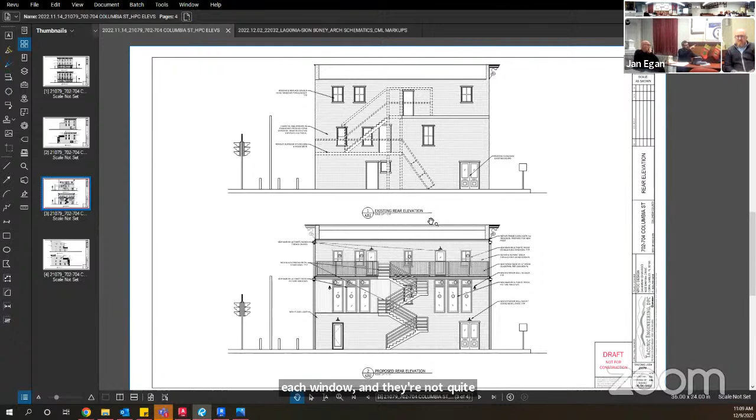There's a good window example on the facade - if you can go back one slide, the side view of the building, slide 2, that bottom right. I think it also matters more because this is going to be much more visible than it was when it was surrounded. I think you're making a good point. So I guess the question is, would the owner be open to something more traditional in terms of window formulation on the second floor, which no longer has a deck?

I think those are great comments, John. I think what we should do is pull this back and present a couple options for that rear elevation. I think so too. Thank you for being so flexible, Chad. Absolutely, sure. All right, so let's do that, and then we'll present that rear elevation and get a direction that fits your thoughts there better.

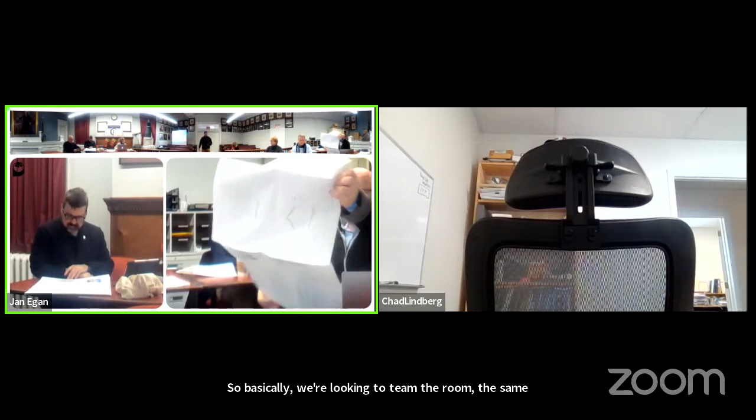So the front porch is the easier part of this application. Basically we're looking to keep the roof the same, everything stays very good. The format of the porch will remain the same, because it will be simplified. The front porch.

So let's call out the major changes, right? The major change is you don't have the pediment, the triangular part above. It looks like you don't have that on the proposed rendering. Like this front here? Correct, right, so it would just be sort of an open...

Is that the major change, or are there any other differences you can call out to us? Right now there are metal railings and we are looking to replace them with just wood. Straight wood spindles? Yeah, wood spindles and railings. Those windows on the sides are gone now. If you look at that side, it looks like it will all be open, just a post. Those are real, yeah.

Are you going to rebuild the roof, or just put new shingles on it? It's starting to detach from the main structure, as you can see. So once we start opening that up, we'll be able to determine whether we can keep the layout of the roof and just re-shingle it, or if we need to take it down and rebuild it. But the basic idea is staying the same. We're just replacing the railings with wood, and the side walls would become an open concept with spindles and a railing around it on both sides.

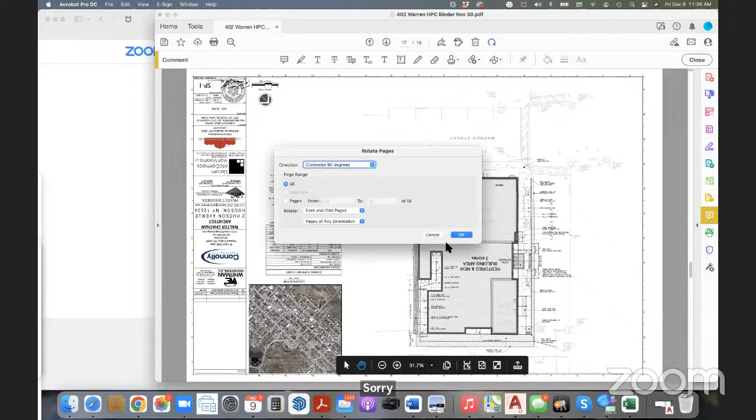In order to do that, we've created a site plan that I'm going to have to rotate at least twice. Sorry. Okay, I won't do that to you again.

So this is the corner of Warren and 4th Street. For orientation, the county court is this way, the old orphanage is that way. Here's Prison Alley, so this is that shallow little building that I spoke of before, and this is the other one. All of this is being proposed as new infill to be added to that volume.

And the way we would like to accomplish that is beginning here on the corner. This would be a fairly straight restoration of the existing building. Here it is, both views of it. And anyone who goes there now will see, if you kind of glimpse at it without looking too carefully, it almost looks like it could be occupiable now.

There's not a tremendous amount of work other than rebuilding the storefront and doing all the interior work that needs to be done. So for this building, the intention is to put it back as closely as possible to what was there, and then on the interior, arrange for a modern hotel.

Then on the side of this existing building on Warren Street, in that little gap, we're proposing what on Warren would be a 2-story building. This would be the kind of hotel bar and an entrance coming down Warren that you could then go in and wander through the hotel public rooms and the dining room and back to the lobby of the hotel.

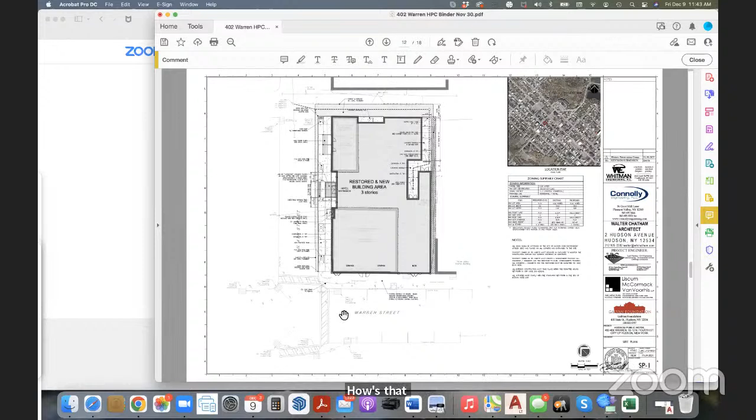Is there anything else that leaves off? No, okay. We need additional information to make any kind of decision.

Also, I think understanding the changes to these existing exterior structures is important, and maybe I just haven't had time to review this in detail. I would also encourage us to go by here, because if you haven't looked at this corner in a long time, it's a really prominent and important one.

So let's all have a look, absolutely. And if we don't have this, we'll have it when the email comes back, or we can send it out to our personal email, or do we have this electronically?

We cannot post it yet. As soon as Walter and his colleagues complete the application, and we approve that, we can then post it onto the HPC website. But we're not there.

We're not there yet. Maybe what I would ask is, do we have this electronically, or can we get it from Walter? Walter, could you send this to us? Yeah, I believe I did, but I'm happy to resend it. I'll write you with my personal email, and then I'll distribute it by text. Excellent, excellent, that's great, John. Thank you so much. Sure thing.

Walter, if you could provide a lot more information about the new structure versus what was there previously, and the village approach you're going for here in the design, that would be very helpful. Yeah, no, totally got it. I think everything that has been asked for is not only reasonable, but easy to access, so I'm happy to comply.

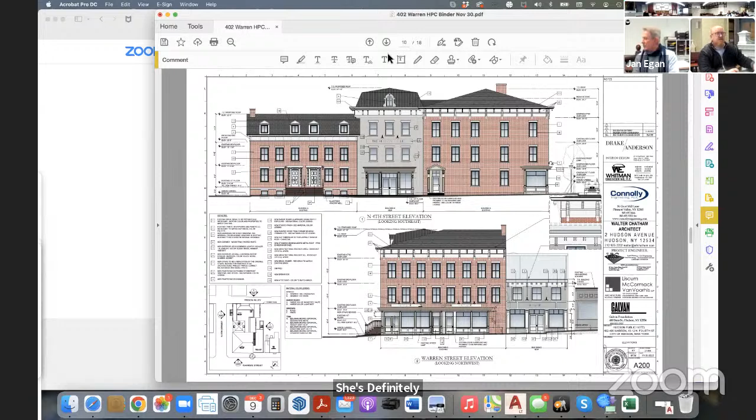Definitely, I think okay. And anything you send out, I will give to the commissioners so they can look at it. Okay, great. Thank you, everybody, thank you.

All right, so the State Street applicant is not available, but he would like to be on the agenda for next week. Okay, Jan, what is it?

555 State, that application is submitted, so that's in your packet.

All right, thank you. I texted the applicant for 204 Warren, it was just a sign. Yeah, can they come in? Can we approve it without the applicant? If it's a sign, it's a simple sign. Do we have a picture of it that Jan can show us?

And 558 Warren Street, which is as well. Here's the application. Yeah, I just want...

What they can do is find anything that's not here today, you can bring it to next time. The problem is we can't ask them if it's an original bracket. We know, but we know the answer. I don't think it is. We might have noticed that.